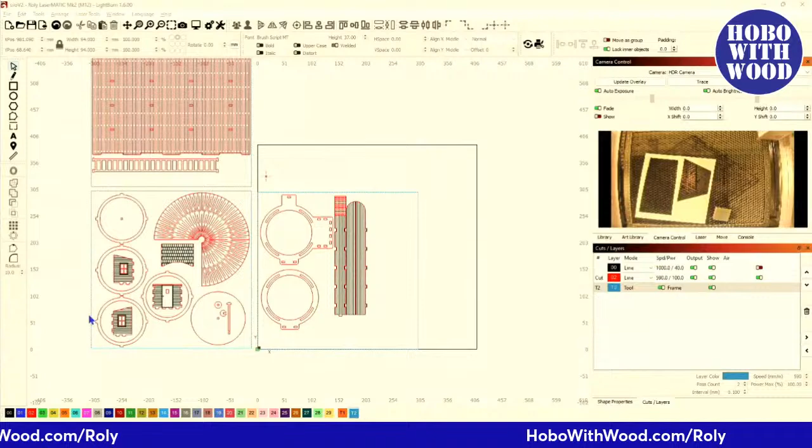So you can see here, I created 295 millimeters. If I select that outermost piece, you can see it's 295 by 235 millimeters tall. And if I say 295 divided by pi, that gave me about a 94 millimeter diameter for my circle that everything else needed to be based on.

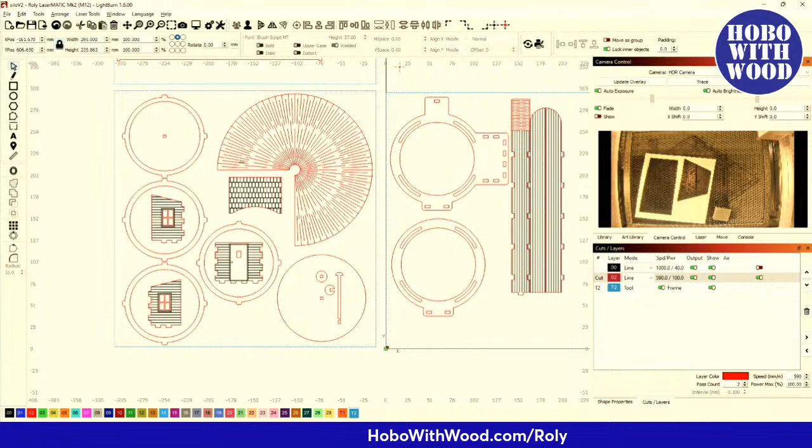The supports, then the top - once I knew how big the diameter was and I knew I wanted a half-inch overhang on either side, I knew I needed to add another inch to that 94 millimeter diameter, divide that, and then I knew what that circle needed to be. So before I could even start making the lid, I had to get the size of this living hinge, which then determined the size of the top.

Like I said, there was a lot of math and a lot of thought that had to go into this. And unfortunately, in my case, a lot of times it's afterthought - you're like, oh golly, I wish I'd have thought of that ten steps ago. Undo, and start again.

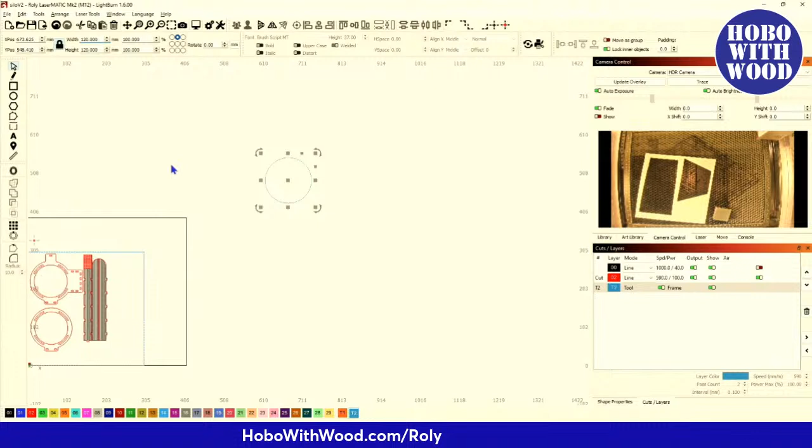But once I had my size, I had a 94 millimeter diameter circle. Draw out a 94 millimeter, lock my aspect ratio. And then I said, okay, I want to have a half-inch overhang, so that's another inch. Say 94 plus 25, so we'll just round that to 120 millimeters. So I had a 120 millimeter circle.

That's what I started with for my roof, my top. Now I had to create the living hinge. But when you create this living hinge, you're going to cut away a quarter of this so it can wrap itself together and form that conical shape. And you need to have a void in the center that will allow it to do that.

And I went with about a 20 millimeter hole. So I drew another circle and said to go 20 millimeters, and then put that 20 millimeters in the middle of that. So okay, there's the basic shape.

But now I had to create the living hinge. And the living hinge, if you've tried to do this, it doesn't work like any other living hinge because of the way it has to taper up. I think I actually did three steps, but I've improved it since doing this to where I think I can do it in two different increments of living hinges.

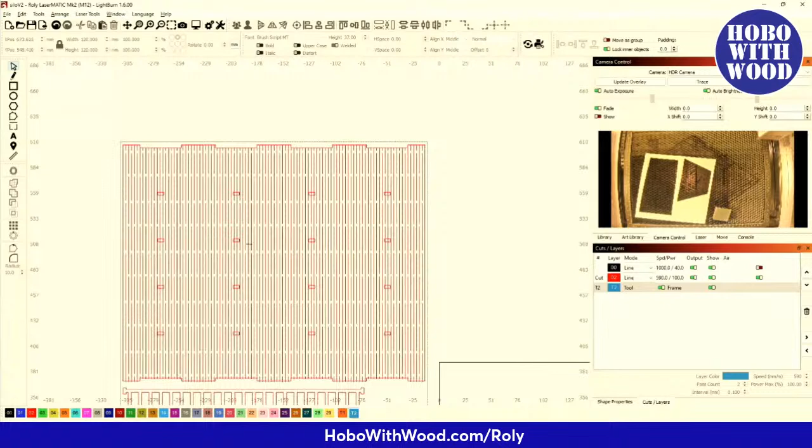When I did the living hinge for this guy, I used the grid array to create that living hinge - that's easy peasy. But this one, I had to use the circular array. And this was the first time I've ever used the circular array to create a living hinge.

And I'm gonna talk you through the math, and there's a lot of it. Some of you'll get it as I say it, or you'll go, oh yeah, I know what he's doing. And then some of you are going to have to back this up and watch it again, back it up and watch it again, or you just say the heck with it, I'm just going to buy the file and be done with it. Because it did have smoke coming out my ears.

Well, I'm gonna let you poke fun at the bear. Can you imagine how it would look if Clack had to design it? He says he hates math, and I hated geometry. I flunked geometry. I love math, I love algebra, but geometry was my weakest.

And Connie says, go slow on the math. All right, I'm going to explain it all.

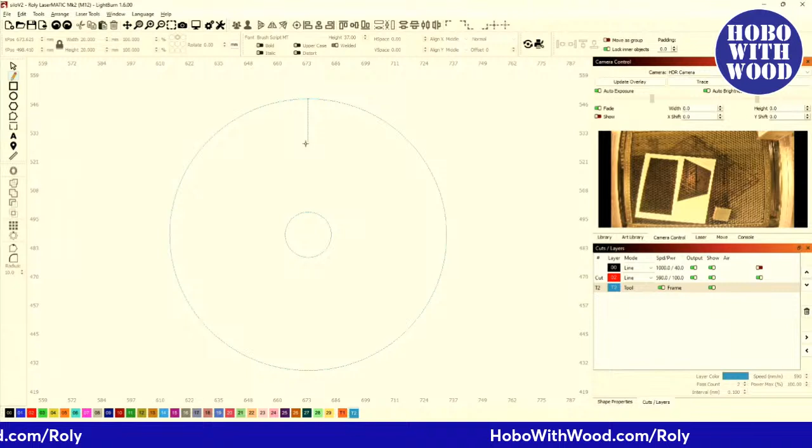So what I did first was come up here, find my crosshairs for the top dead center of my circle, hold my shift button, and draw a straight line. Doesn't matter how long, any straight line. Once I got that straight line, I selected it, and then I come up here to my height field. I don't know how well you're going to see this on the screen.

I'll use this field as a calculator, and I'll do this for you twice - once here, then I'll open the calculator and show you again. So if I've got a 120 millimeter diameter, half of that, the radius, is going to be 60 millimeters.

And here I want to have 3 lines, 3 cuts going across. So if I've got 60, before I divide that by 3, since I have 3 lines, I need 2 spaces in between, because I want the first line to go all the way to the edge and the last line to go all the way to the edge. So I need 2 voids in between those, and I want a 3 millimeter void in between each one.

I haven't seen any scientific proof or facts saying otherwise, but when I'm working with 3 millimeter material, when I do a living hinge, I make my gaps 3 millimeters. If I'm working with 4.5 millimeter material, I make the gaps between my cuts the same thickness as my board. That way, if you were to do a cross section of that cut, it would be a perfect square, and I think that's the strongest shape you could have. I don't know if it's right, but that's the way I do it.

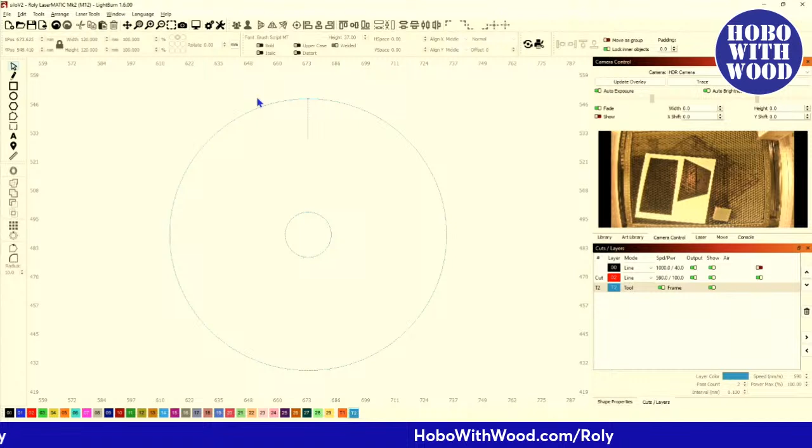So then I selected that, and select that outer one, and make sure it's in the center and at the top. And there it is. Now I'm going to open this up and clear all this, and now you can see this.

So I've got a 120 millimeter diameter, divide that by 2, gives me a 60 millimeter radius. I need 2 voids between 3 cuts, and I want my voids at 3 millimeters each, so I'm subtracting 6 millimeters. That leaves me 54, and I wanted 3 cuts, divide that by 3, that gives me 18 millimeters per cut for my first cuts. So now that is 18 millimeters.

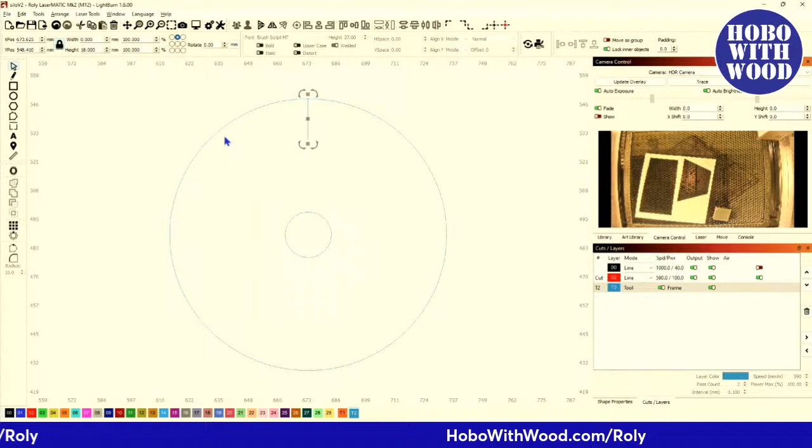Now I will use my grid array to create 3. Oh, did I do that wrong? No, I did do that wrong - see, this is what I'm talking about. You screw up, but hey, I found it before I got too far. I forgot to subtract half of that inner diameter.

So let's go back to the calculator. Cancel, go back to the calculator. So I got 120, divide that by 2, gives me 60, and I need to subtract 10 right out of the gate, so I'm down to 50 now. Now subtract the 6 millimeter void and divide that by 3, that gives me 14.6666666666. So now I know my length, and I've already centered this line.

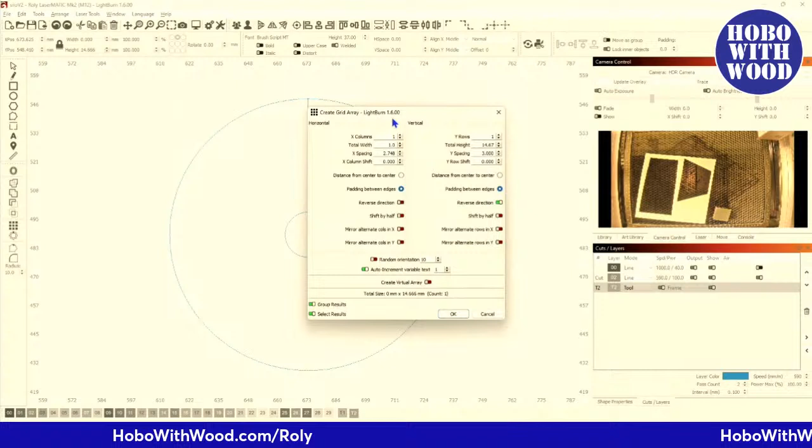Make sure your anchor point is in the top dead center, because you don't want that to move. So move that up there, and now you can come down here and change this to 14.666 and say enter, and that'll draw that line up. Now go back to your grid array and put in 3 of them with 3 millimeter spacing, say okay, and group your results, say okay. And now you've got that all the way out to the edge and all the way to the inner edge with the perfect spacing and perfect cuts for this size, for this shape.

Now select this entire piece, and we're going to move our anchor point back to the center, and we're going to rotate this negative 2.5 degrees - not negative 25, negative 2.5 degrees.

Now that I've rotated that, I can come back up here and draw another straight line. Doesn't matter where you draw it there. And this one, I'm going to align it to the center and align it to the top. Then I'm going to select it, and I've got my move functions, my arrow move function, set to 3 millimeters.

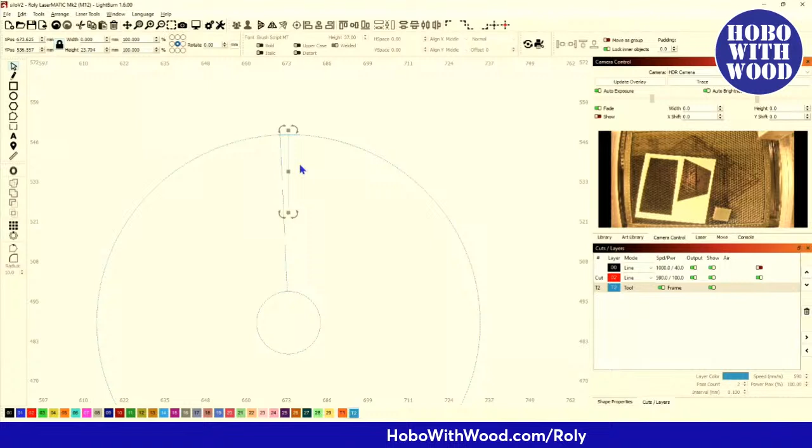Say okay, so I've got it selected. I arrow down one time, that moves it in 3 millimeters from the edge. And I'm going to look here - I think 2.5 millimeters. Let's do it. Let's go back and rotate it 3 degrees. Undo.

Rotate 3 degrees. Not 3, negative 3. I want to rotate it counterclockwise, negative 3. Now draw that straight line.

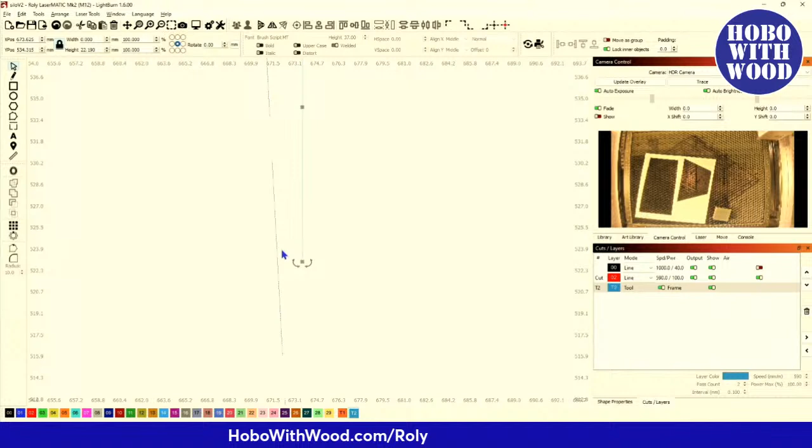Select it, top dead center, and then move it down 3 millimeters. I did that because I wanted a little bit more gap in between here and there, and that's still too much, that's too close. But I want to have a 3 millimeter gap here, and because this is a round conical shape, I have to deviate a little on the way I would normally lay it out.

So I've moved my anchor point back up here to the top of this one, and I'm going to reduce this to, let's look at 20 millimeters. Let's look at 18 millimeters. And I'm going to stay with that.

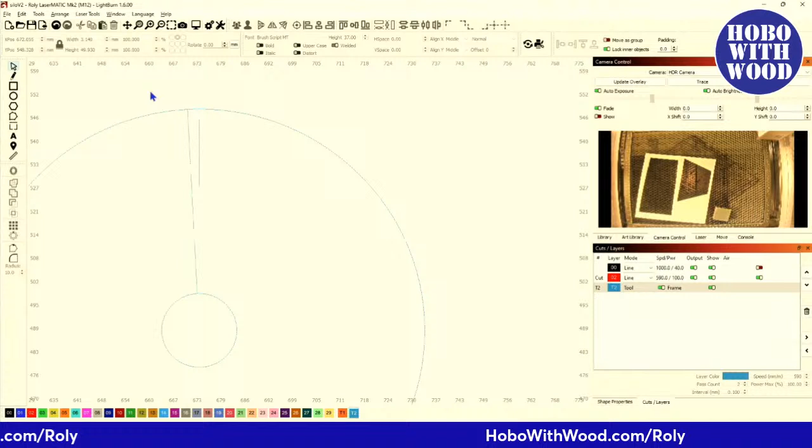Now I'm going to take that one and group those together. And with that group together, I will rotate the entire thing back 3 degrees. That'll work, well I will make sure I didn't rotate it from the center. I don't think it'd matter, but I'm rotating it from the center 3 degrees. There we go, all right.

And now selecting that group and the inner circle and doing a circular array. I'm doing 40 copies and say okay. And there's the first part of the living hinge for this piece.

Now what I need to do is rotate this positive 3 degrees and draw another straight line. Select that line, put it at top dead center.

And I can put it at there, but that's not where it's going to live. It's not going to start there. This one is actually going to need to come all... in fact, I'm not even going to put it there. I'm going to put, well, yeah, I have to put it there. There.

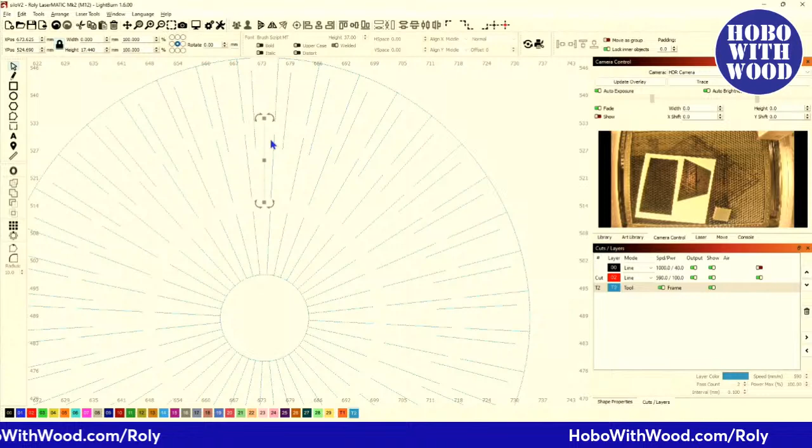Actually, I should have done 2 lines on that. Undo again. There we go. Undo 2 of those.

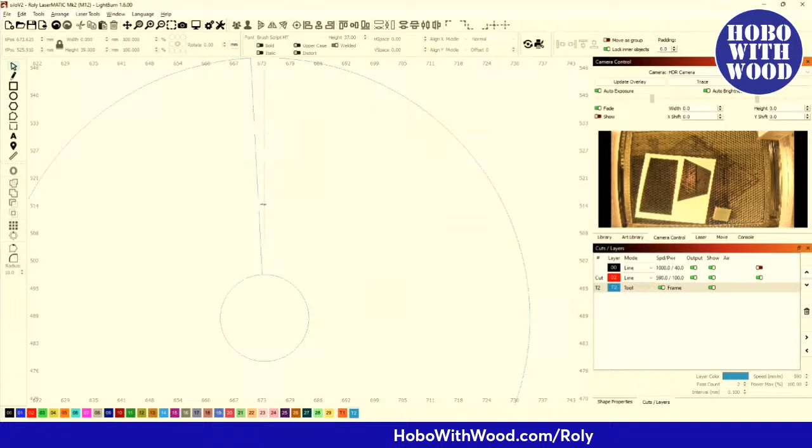And that one's actually going to be shorter, so I can ungroup that and then change that length. About there, give or take. Nope, group all that, I did group it all. And then this one, circular array 20, good.

So that was 3 and 2, and now I need to do 1, and we'll rotate it from the center and rotate it again. Just keep going negative. All right, and then another straight line.

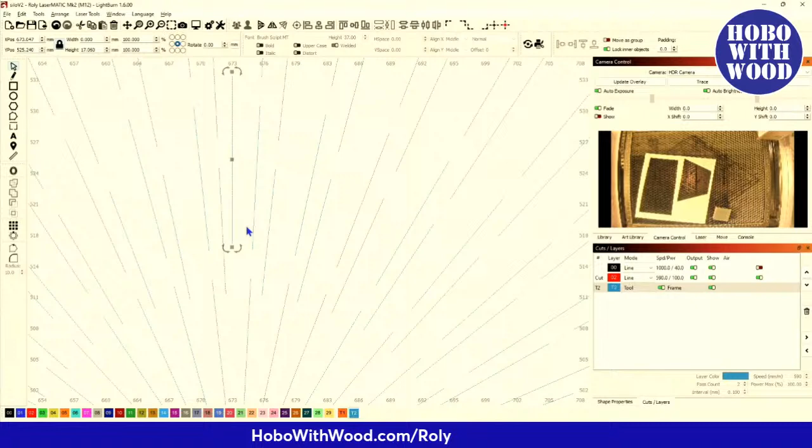And that one's not really, I was going 3 degrees and I was thinking sets of groups of 3 was what I wanted, but that's not where I positioned really, really well. But without having to go back and undo a whole lot of stuff, I want to put that cut in between those two as centered up as well as nice as possible.

So I'll just draw a rectangle about like that, and then tell that to go to the center of that rectangle. And that centered that up better. And I can get rid of that.

Now this one, I think I did this 2 or 3 days ago, so I forgot actually how all my steps went. We'll take that one, because this is not looking like the way my first design came out. Maybe it actually, maybe it is, maybe it was just something like, no, I don't remember. I don't remember, folks.

Once you got that one, in fact, you know what? Duh, I got it right here.

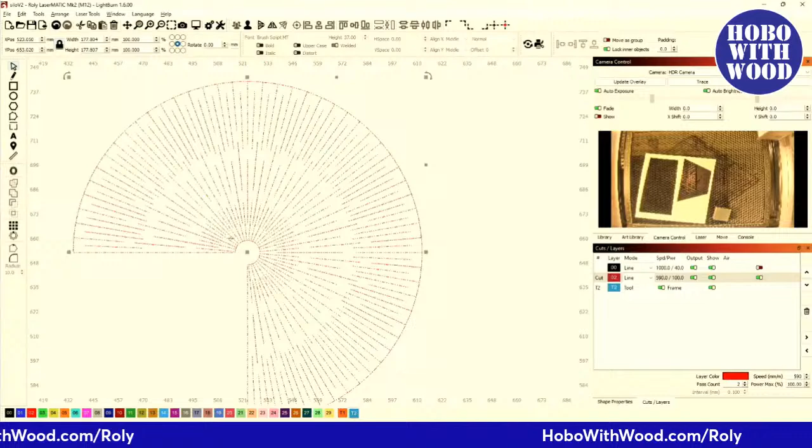I'll answer it. So I had 1, 3, 1, 3, 1, 2, 1, 3, 1, 2, 1, 3, 1. So you can see the pattern that I ended up creating, and I went through half a dozen or more iterations of this living hinge to get it to work.

But you're starting to see the real trick is figuring out the math. How long, what size is it going to be? What's your overall diameter? I showed you how to figure that out. Then how long do your cuts need to be? Well, you know what your diameter is. Half your diameter, whatever your void is, subtract half that diameter. And then whatever your material thickness is, subtract the voids between each cut and divide by the number of cuts you need. That gives you your length of each cut.

And there, I finally, when I went back and looked, I did 1, 3, 1, 2, 1, 3, 1, 2, I think it was. And that allowed it to wrap up and do what I wanted it to do, and to bend the way I wanted it to. It doesn't have a uniform living hinge like your typical living hinge. You see the larger voids where there's a different number of cuts. It has to be irregular in order for it to bend and come up in that conical shape.

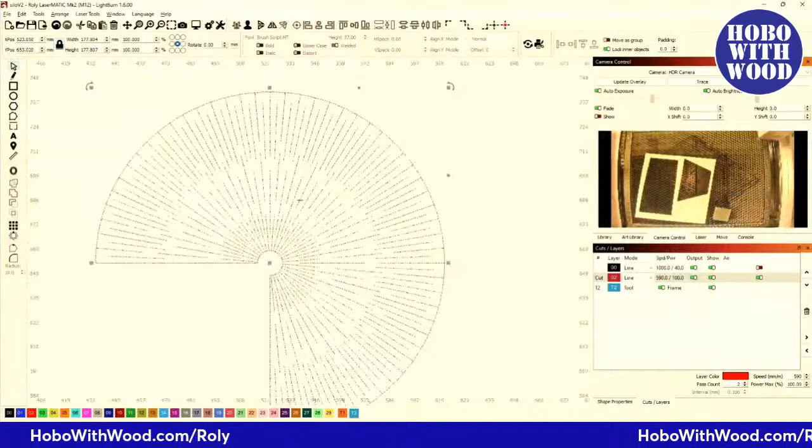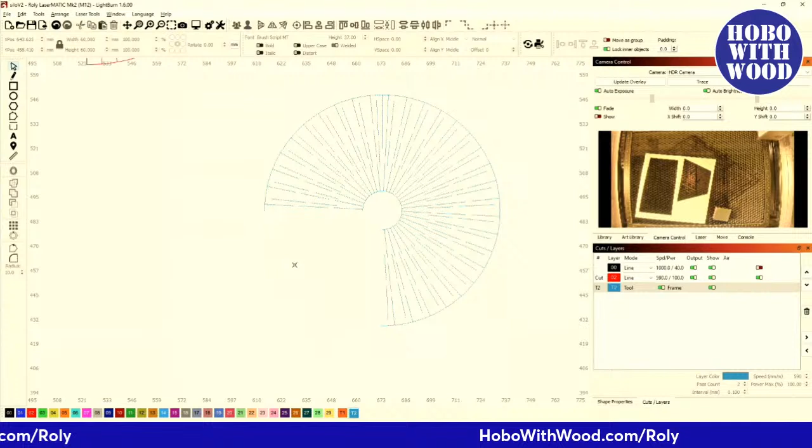Now, how did I get that cut? Once I had this, let's say this was the final design, if I had a 120 millimeter diameter, I drew a square, held my shift key, drew a square, told it to be 120, so I went half of that, 60. So I got a perfect square, 60 millimeters, and put it right in the center, right there when it snapped. Then I selected my shape, held shift to select that, and then tools, cut shapes, and then select that piece, delete it, and close that up.

Boolean tools would work too. Edit, undo. And I'm going to put this on a toolpath to see it better.

So A and B. No, because that's the reason why the living hinge is funny. They're lines, they're not shapes. And because you're working with lines and not shapes, the Boolean tool won't work with the living hinge, so you have to ungroup all of that.

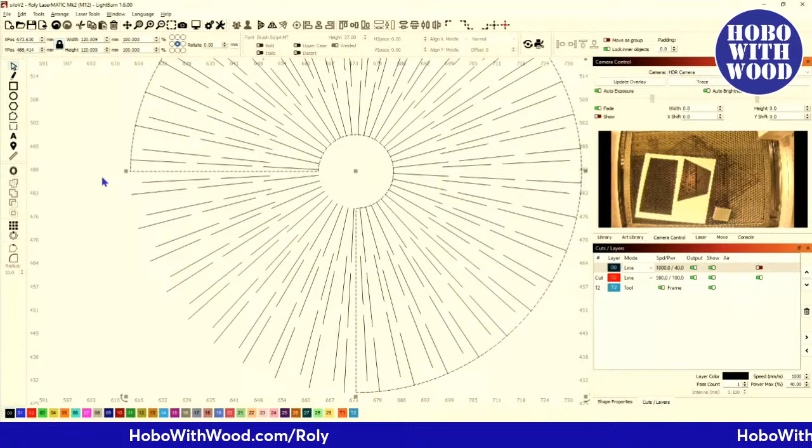So ungroup, then select your shape, your circle, and you can group those back together. So that's A, and then select B, and then you can subtract that, and that would give you a closed image, and you can select all of those outside of it. Well, actually, that's still grouped, so you have to ungroup it, and then you could select all of them and delete them.

Come on. There we go. And there.

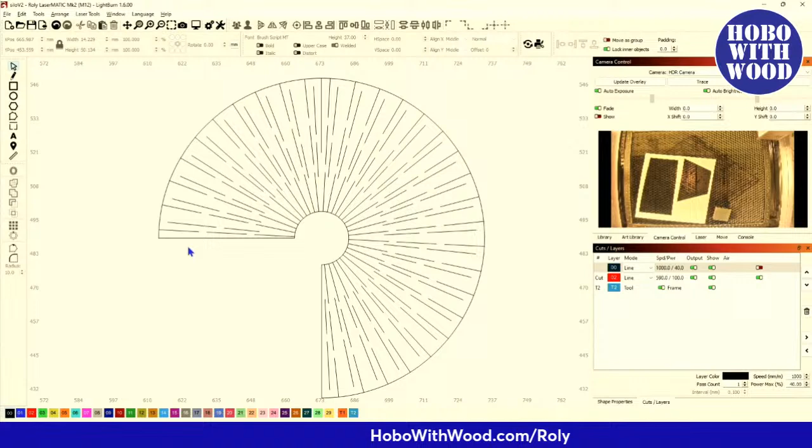But because those lines are lines and not shapes, you can't use Boolean with lines. But if you unselect that and just get your two circles, group those to make those two circles one object, then use the rect or the square as a cut shape for your Booleans, that would give you a closed piece there that you don't have to close with the cut tool. And that gives you that. So that's how I got around to finally coming up with a living hinge that would fold up and make the conical shape the way I liked it, the way I felt good about it.

So let's go back to those questions. Go back up here to my asterisks.

I don't know about you guys, and I think, Jack, you may have seen it. Every time I see an asterisk, our local police department has special license plates on some of their cruisers that show the number 1 and an asterisk. I finally broke down and asked what does the 1 asterisk mean, and they said, say it. I said, say it, 1 asterisk. And he said, yeah, say it slower. 1 asterisk, 1 asterisk, 1 asterisk is our SWAT guys, our special response team. But I'm thinking, okay, that's cute, but is that really appropriate for the front of our police cars? Don't know.

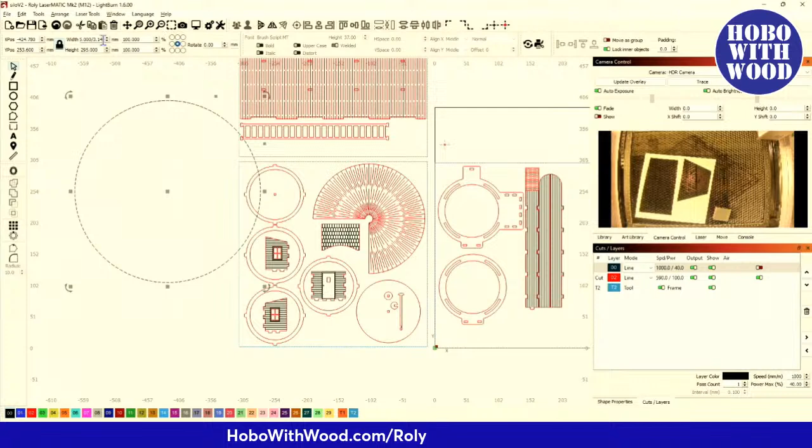Let's jump over here and use the actual numbers. I said it was 295 millimeters. So if I drew out a perfect circle and told it to be 295 millimeters... not quite, divided by pi. 295 divided by pi, there we go—that's the outer diameter of my living hinge rolled up. So instead of doing the actual math and figuring all this out, a lot of this I just did by recreating the physical environment and letting Lightburn do all the math and figuring for me.

So I've got that selected. I simply said let's do an offset inward. My material is 3 millimeters. Don't delete the original, say okay. I'm going to put the outer one on a toolpath because that's my outermost piece. Actually I need to put them both on a toolpath and we'll group them up. So there's the cross section of the column. And actually I don't want to group them because I need to be able to select that one individually.

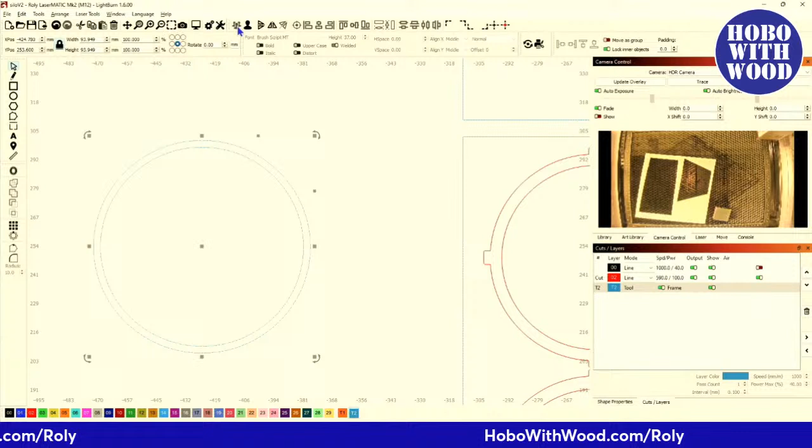Now that one, I could duplicate it, but I'm not going to bother because the tabs are going to stick through there. This will be the outer diameter of that support. I'll do another offset and make it 5 millimeters just to give it some strength, some rigidity, make it rigid. So now that would be the ring. And then my slots, I used 3 millimeter by 6 millimeter—so it was 6 wide, unlock my aspect ratio, and 3 high. And put that on top dead center of that one.

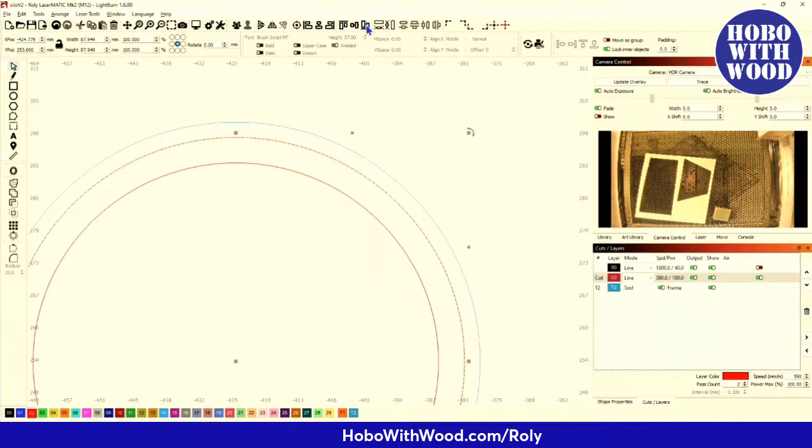Oh, wrong way, Conway, up there. Actually, I didn't want to do top dead center, I wanted to align it. So if I've got that up there, I'm going to turn off my toolpath so I don't see it for right now. Now with that selected, hold my shift button and select that one, and say Alt-Shift-V for vertical. That'll bring that right to the outside of that.

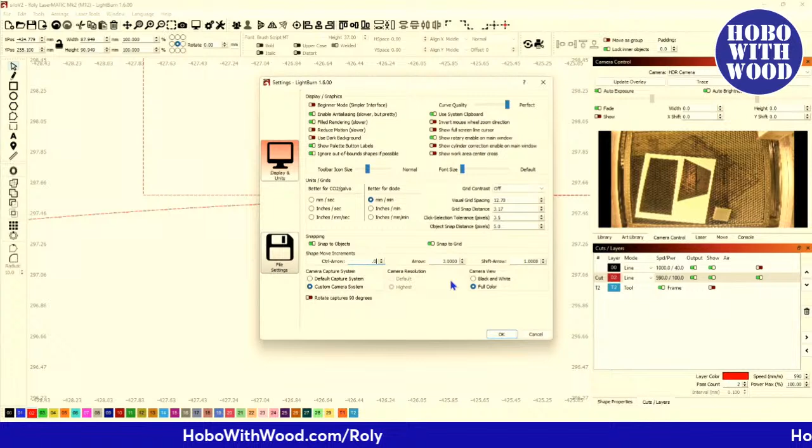And if you look, you've got a gap there, so that's not going to weld up very well. So then what I do is I make sure I've got my movement, my control arrow, we're going to do it at 0.002 and say okay. Now select just that one, hold my control button and my down arrow button, and bring it down until that's inside my circle.

Once that's inside my circle, hold my shift button and select the circle, circular array. I only need, you can do as many as you want. I went with 4 because I wanted to have as few places I have to insert, and also I wanted as few holes in the side of my silo as possible. So I went with 4. I group my results and select my results are turned on, so that will select my array when I'm done. Now all I have to do is hold my shift button, select that outermost circle, and weld them. And there we go, there's a support ring.

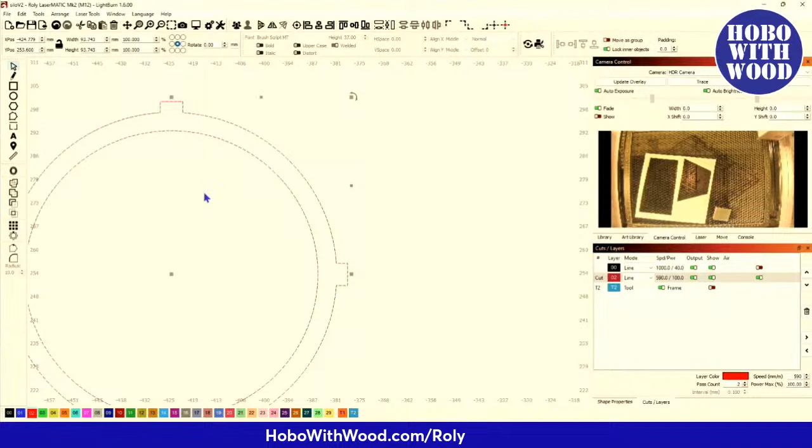But to make this easier to assemble, especially because you're rolling this up, if you've watched the assembly video, I put one in and then I'd start rolling it up like rolling a cigarette, rolling that up on its sides. Because I'm rolling that flat piece up and hitting that corner, to make it go in as easy as possible, I put a small radius on there so it can slide over that and not have a hard corner.

What I should have done, if I hit undo, take it back to that, just go in here, and now with the singular, hit my radius tool. That was 3 millimeters tall, and so I went with, I think, about a 2 millimeter radius. Nope, didn't do 2, that's too big. I think it was maybe 1 and a quarter. Yeah.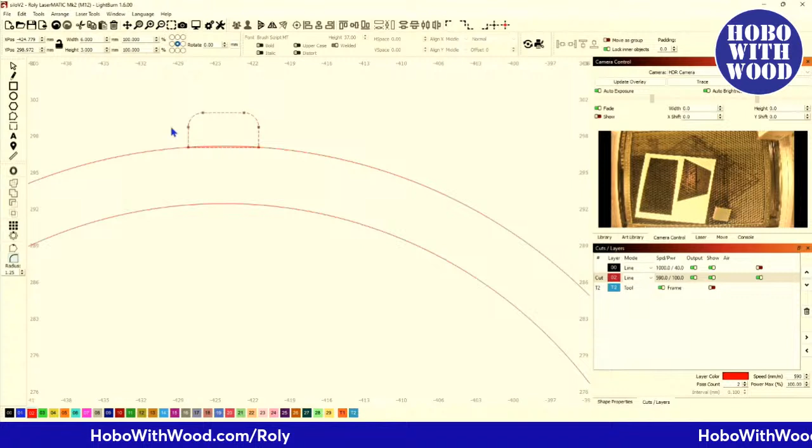Now with that, hold my shift key. Now do the circular array, 4 of them, grouped and select. Okay, hold my shift button, select the outer one. And now I want to show you another thing.

If you have problems, you're like, wait a minute - because I get people all the time who say, I did what you did but it didn't work. I did everything you did and it didn't work. But you didn't do what I did, or else it would have worked - if it worked for me, it's going to work for you. And that's why I love those comments, like, well I did that but it didn't work. Well, then you missed a step. I want to show you what you can miss when you're trying to do this that makes it not work.

So here, I've got my circular array that I just generated, and I hold my shift button and I select that outermost circle, but the inner one is not selected, just the outer. And then I can weld it to that circle, and now that welds that up. Now I can grab both of those and group them, and now that's one piece. I can move it around anywhere I want by grabbing just one piece, I ain't got to worry about it, everything's together.

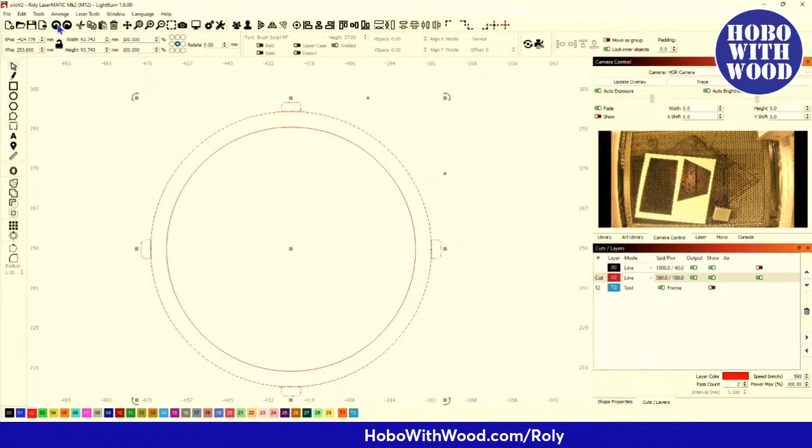But what can happen if you're not paying attention to what you've done and when you've done it? There we've got a group array, we've got a single circle and another single circle. Well, if in your process of creation, like I did, I grouped those early on and I said, well no, I'm not going to do that yet. Well, if I had left those grouped, and now if I grab this and hold my shift button and select that, then well, that still worked.

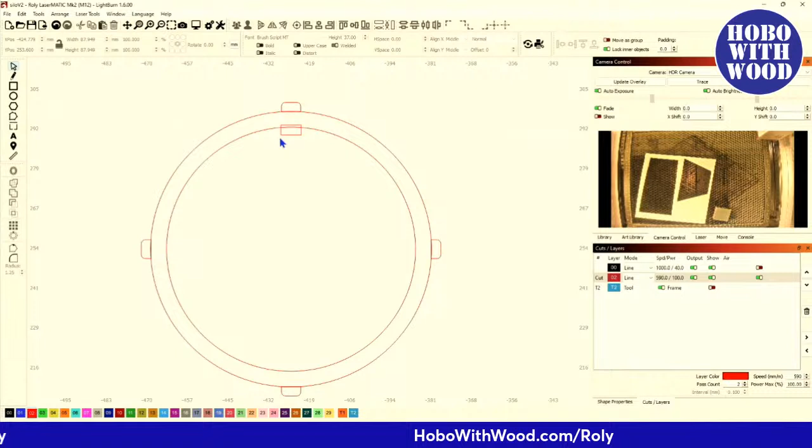But if that was - if those tabs were on the inside, and this - I just want to show you where this can be a problem. People say, well it didn't work for me. Well, you did it backward. If those tabs, I'm just going to create a new one instead - and if it was in here like that, and these were not grouped, if I select that and select this and weld it - where'd it go? Welding did not give me the piece that I wanted. Undo.

But if I've got these two grouped, hold my shift button, select that and weld it, then that creates that.

Whenever you don't get the result you're looking for, it might be a grouping issue. You've got either things grouped that you shouldn't have if you're trying to get a certain outcome, or you need to group things that aren't grouped.

I've got a comment or two to address from folks saying, yeah, I tried that, it don't work. Well, it's not because it don't work on your computer, it's because there's a PICNIC error. Problem in chair, not in computer.

Before I go too much further, let me look and see if there are any questions. Well, Nancy, I don't have a lot, but I appreciate all you do, Kent. Thank you very, very much, guys. I am grateful, very grateful.

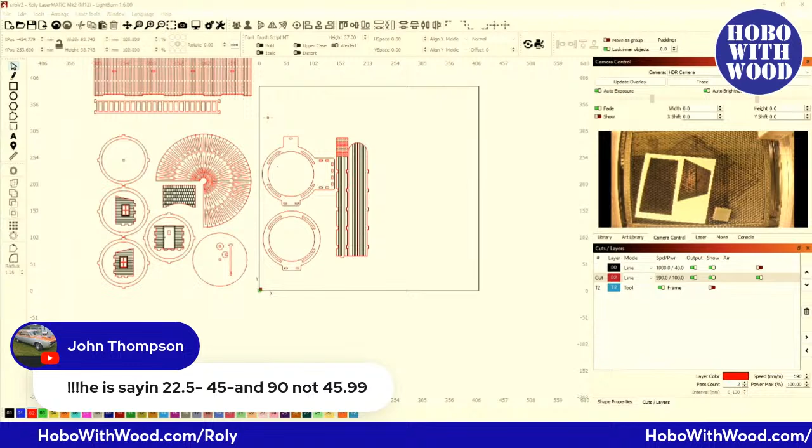I'm guessing you guys are following these comments too. I'll be honest with you right now, I don't understand a lot of this. I see it and I can make it work and figure it out, but I don't fully follow what you guys are talking about. If y'all know math, algebra and all that, I get that's divisible, makes the equal divisibility of 360. I don't know, did I say 45.99? I don't know where that's coming from, but okay, 22.5 or 45, okay.

Now I'm with you. Sorry, guys.

Before I jump back over, there are times when I edit nodes on one thing, then add a shape to that, then try to weld it, and it will not weld. No matter which way I select it, can you help?

Yeah, the reason it won't weld after you've been doing node editing, and I know this because I have the same problem, most likely is that after you've node edited it, you've left it as an open shape. And an open shape, while it looks like a shape, technically is just a line. You can't weld anything to a line, so it has to be a closed shape to weld objects to it.

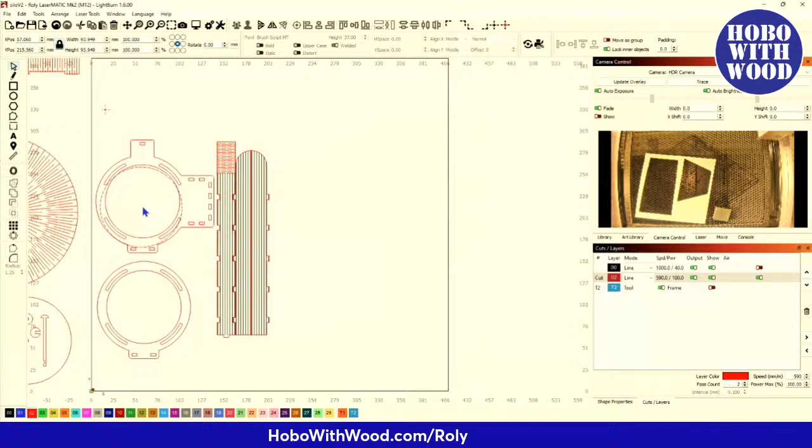All right, so there is my innermost circle. Or that I should say that is the outer diameter. That's the outer diameter, if I did that right. And we'll just double check it. Aspect ratio. It was 295 divided by pi. Yep, all right, so that's the outermost diameter.

And I'm going to put that on a toolpath and turn my toolpath back on so I can see it. And I want to bring that one over here. I can't center it on that one, but I can't even do it on this one because this additional shape down here is throwing off my ability to center it. But there we go, that snapped into center there. And if we look...

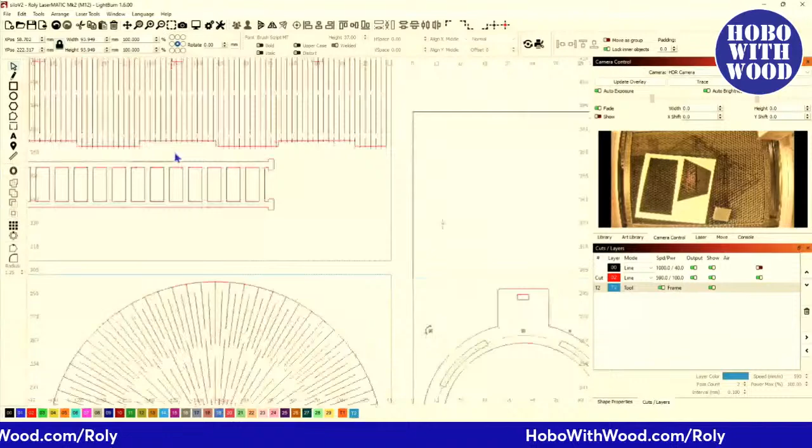Make sure I got that right. Is that 295? Yep, 295.

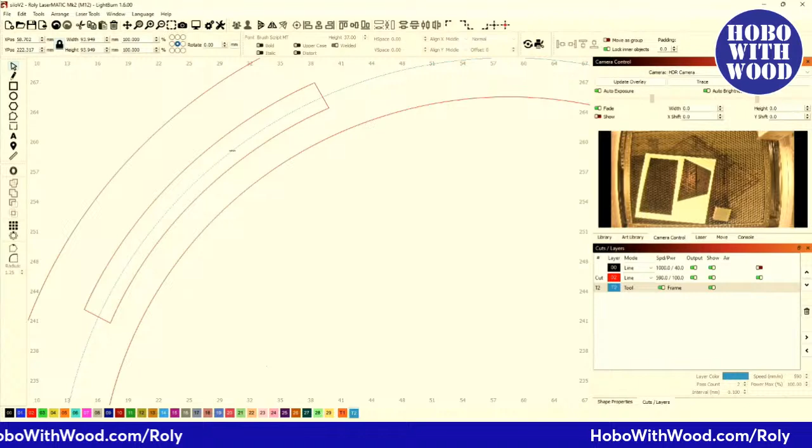I may have had to go back, because like I said, I designed this, redesigned it, designed it again, redesigned it. But in my mind, the way that this piece needed to be put together is if that is the outer diameter of that column and it's 3 millimeters thick, then those pieces should have gone on the inside, right? That's the outer diameter, and yes. Then I would have thought that those pieces - but here it looks like that is centered up. And I've assembled this a few times. And I've slept once or twice since doing this. But that's what it's looking like. There's my outer diameter, and it's centered up in those squares instead of inside of it.

All right. Well, how did I get that shape?

Three millimeter - I have a 3 millimeter circle, or square rather, and I'm gonna put it up here. Where'd you go? Oh, wrong way. All right.

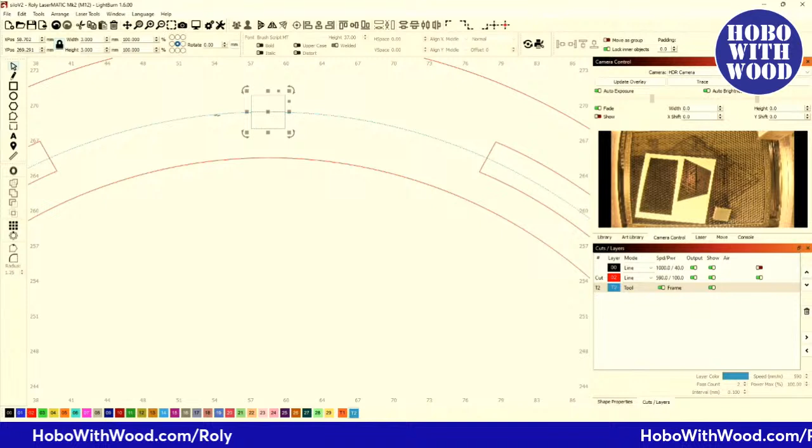Now, with that like that, holding my shift button and selecting that circle, come over here to circular array again. And now I'm going to change my step. I'm decreasing my step to bring those to where they overlap each other.

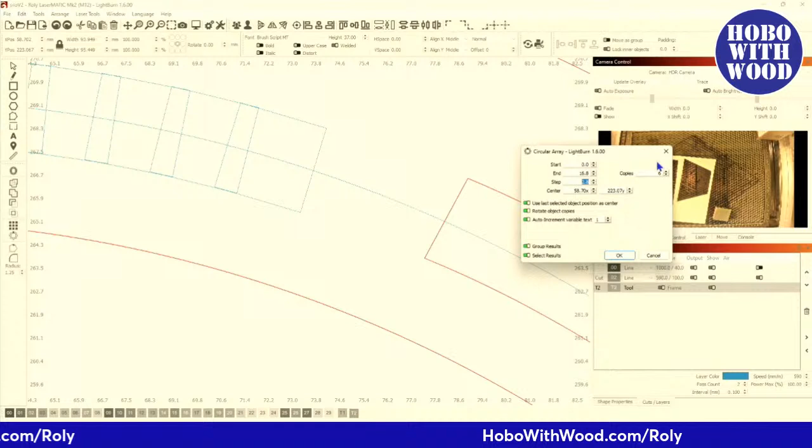And then I'll increase my quantity and get the step to where I want it to be, to where I get the size that I want it to be. And now I'm starting to get a gap, so that don't work. So we'll decrease the step again and just keep - nope, increase that step. There we go. And then group and select.

So that right there, and I'll hold my shift button and bring that back to the center. I didn't want it to go that way. Undo. I'm going to move these out of the way now, move them up here. I'll move them over here even more.

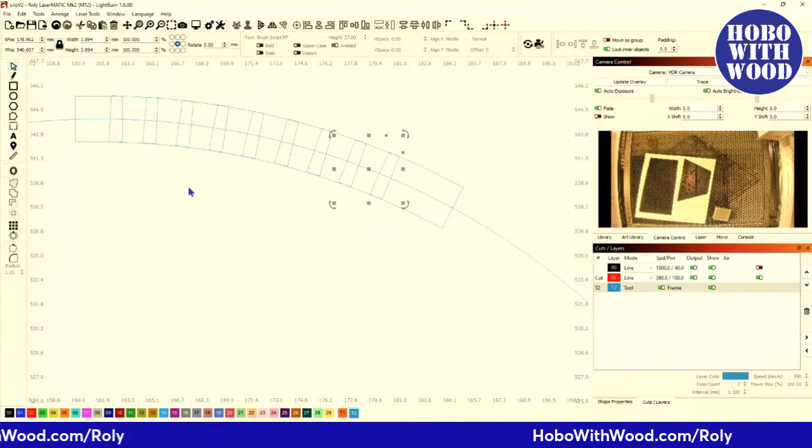There we go. All right, so now I've got the basic shape, but they're all a bunch of individual pieces. So I'm going to ungroup them and just weld them together. And you can only weld 2 objects at a time.

And there is the shape that I needed. And now I needed to create 4 of them, and we're going to put our step back, and we're going to do 4. Come on now. Nope, 3 copies.

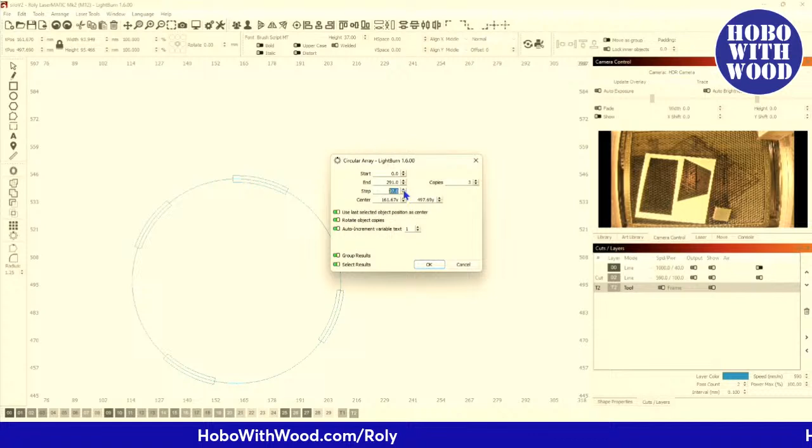Well, because I'm not at top dead center, I'm having to put it where I want it. And okay. And that's how I was able to create the slots and position them where I wanted in here.

And then it was just a matter of creating the necessary offsets. Delete the original, and there we go.

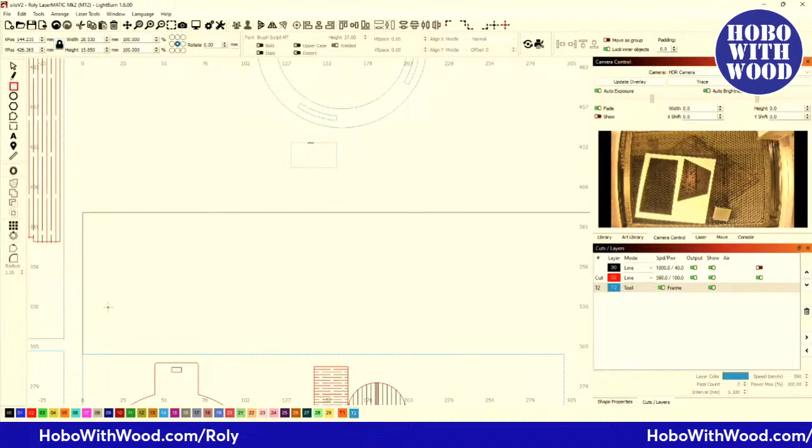Then it was just a matter of deciding where I wanted to put the grain elevator, the shed, and the ladder, and just create the rectangles for those and line them up with the - come on, puppy.

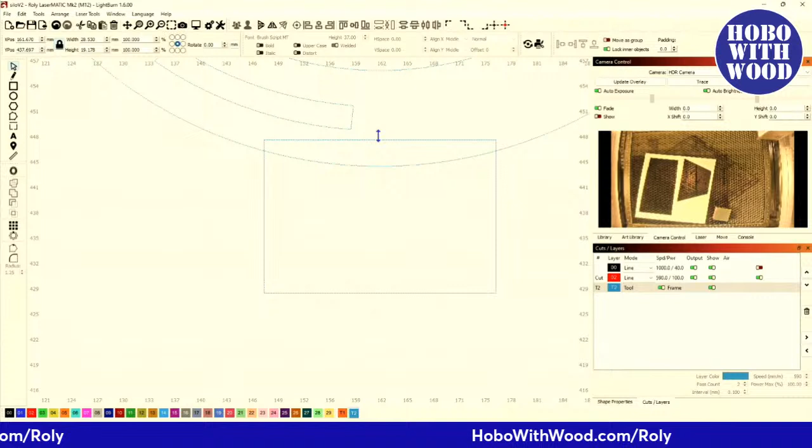Alt Shift V. And again, when you're welding a rectangle to a circle, if that's the size you want it to be, well, there's a gap there. Instead of moving that in, because I wanted that to stick out that far, just drag that in until it overlaps. That way you still got the same distance out here. And then weld that to that. And then give it some radius on these outer corners so it just looks nice.

And so on and so forth. And that's how I did the tabs out here for those pieces.

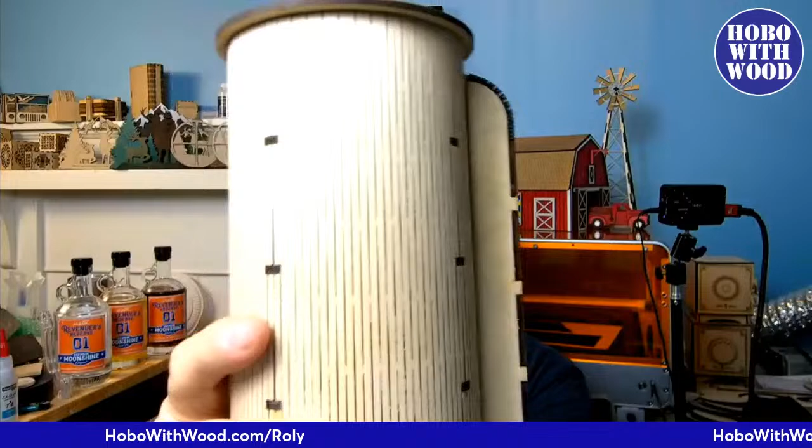And then on the chute, the grain elevator, that was a simple living hinge. And then because of the way the living hinge creates those vertical lines, when I did this one, you notice I did not have the marks on the grain elevator. I didn't engrave any lines on it. And I said, that stands out like a sore thumb. I did not like the way that looked.

I didn't like the way I had those oriented either. I changed it - the original was shed, grain elevator, and then the ladder. So it's like, okay, we see the shed, well you only see the grain elevator, and if you see it that way, then we'll only see the side. I didn't like that, so I had to rearrange both of those so I could put my shed out front, see the grain elevator, and then the ladder, all of them there.

But on the grain elevator, I opted to engrave vertical lines on the sides. So now it's more aesthetically pleasing to me. It blends in, it looks like it's made out of the same corrugated steel, if you will, or the metal, aluminum, whatever they made it out of.

I left the shed natural, so it looks like an old wood shed, but with lots of detail in the engraving - the door frame with the 45s, same thing with the window frames and the mitered edges, and the lap siding engraved into the side of it.

And then I forget who it was, somebody commented about how much they really liked the way this paint was done, and it shows up better in the photographs. There are parts of this that look like it's got some age, or wouldn't really be rust, but tarnish. And I painted this in 2 steps. I painted it with a high silver metallic spray paint, and I did it with one light coat. I did not do a heavy coat.

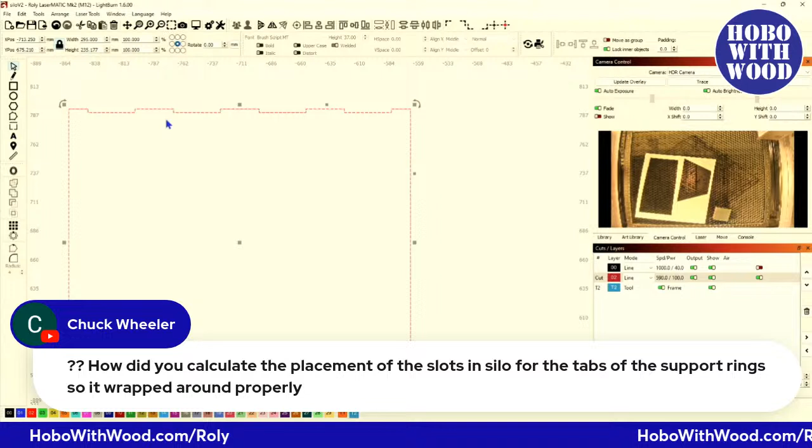So initially I actually started out with a rectangle. If I go in here to node editing, I'm going to delete all those - not that, I hit the delete. See, I do it all the time.

I know better than to hit the delete button. If you select all your nodes and then hit the letter D for dummy, it will delete them. But if you hit the delete button, it'll delete everything. Shame on me. In fact, I don't need that right now, and I don't need that one right now, and imagine all those down there are gone too.

I started out with just a rectangle that was 295 millimeters wide, because that was the thickness, or the width, of my material. And then the height of how tall I wanted the column of the silo to be.

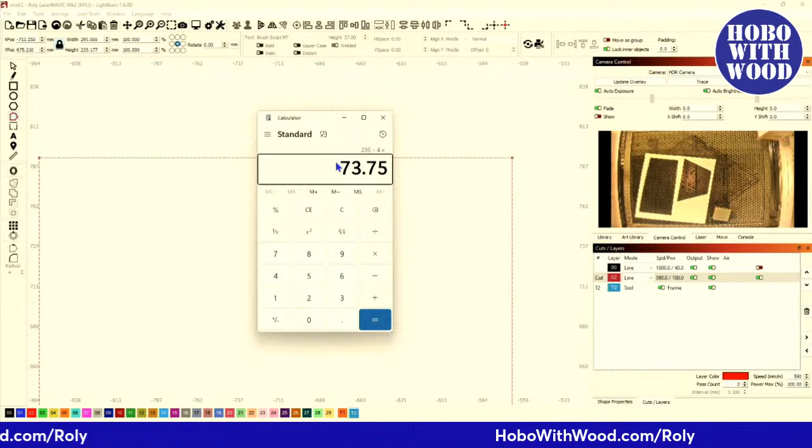Now I had to figure out the tabs, and I knew I wanted 4 tabs. So 295 divided by 4 makes them 73.75 if I had 4 tabs. But I don't need 4 - I want 4 tabs, but if I've got 4 tabs, then that means I've got to have 1, 2, 3, 4 spaces.

And I split my tabs up so that - and this is something I did intentionally - I used, I can't even find it on this. Okay, here. On this one, I had the seam behind the ladder. But the seam is behind the ladder, and it comes up here.

The seam is part of that grouping so that when those went into a slot, it helped pull it to a final defined dimension. Otherwise, if the seam's over here on the side somewhere, then there's nothing holding that seam or pulling that seam together. So I thought about that when I laid out these tabs as well.

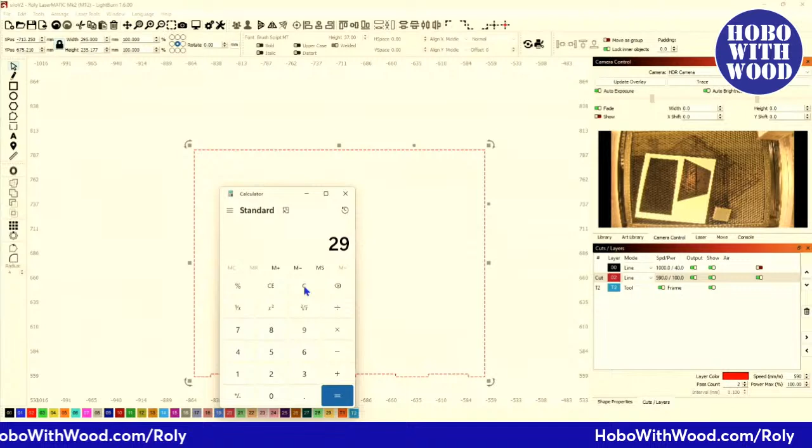Not 5 by 9, stupid. Come on. 295 divided by 9. There we go.

So I needed 5 equal - 5, I did it again - I needed 9 equal spaces. 5 of them would be tabs, 4 of them would be slots, right? So if I needed 32.777777 to equal the width of one of those...

Draw a rectangle tool. 32.777 and 3 millimeters.

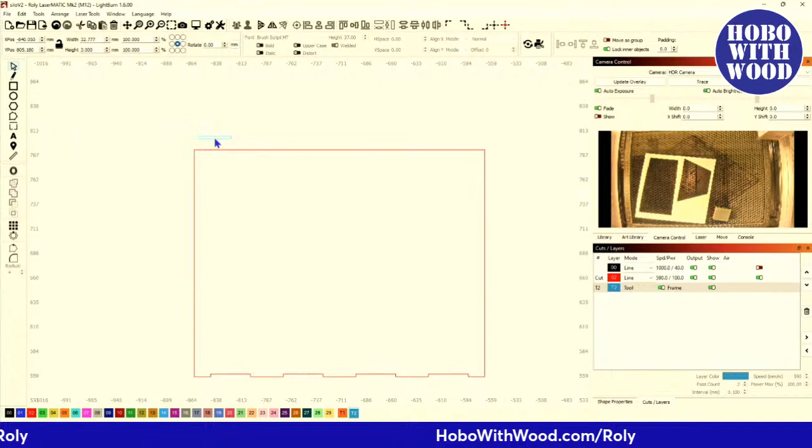And then what I did - if you go in there tight, you see I get the little, I hope it shows up for you guys, but if you go to the center, your cursor will change to where you get a little circle right there. You can grab that circle once your cursor changes, and I'll snap that to the corner of my material.

And now I can do an array with that 32.777 - not column, not rows, columns. Why didn't that go to 0?

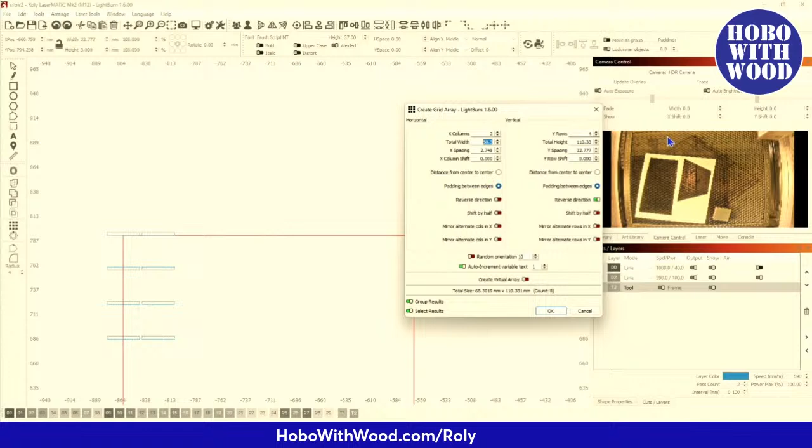Oh well, we'll just cancel you. Columns. 32.7777.

And I'm not getting the result that I thought I was going to get. Oh, okay. Got to think.

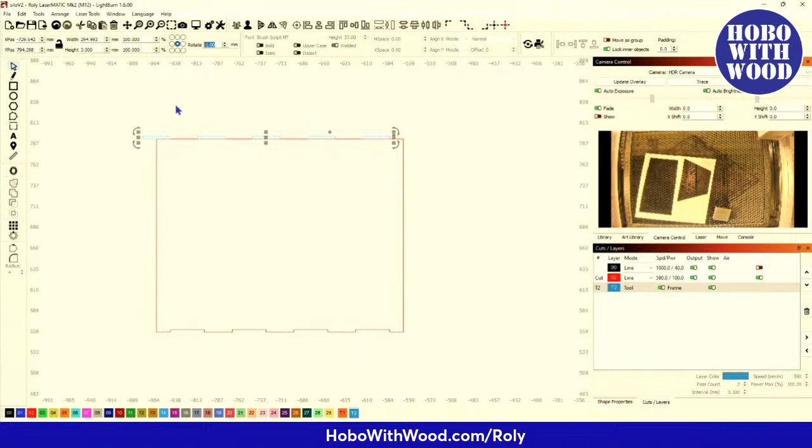All right, so that's the grouping. So I'm going to take and move that. Why did it rotate on me? Didn't want to rotate it.

Grab that, find that middle. There it is. And now snap that to there. There we go. Is that right? Yeah, so now with that there, that's grouped.

Now I first select my rectangle, hold my shift button and select that array, and subtract. There we go. Did that give me? Nope, that was backwards. I might have had it right to begin with.

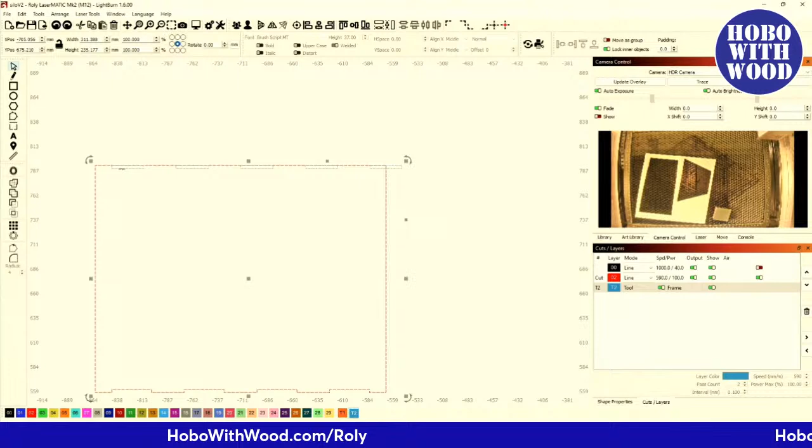But it's getting late and my brain is cooked. But what I did is I found the right spacing, which was 32.77. And then half of that - go back there. Ungroup that.

And actually, you can use this as a calculator, 32.77. Unlock your aspect ratio and divide that by half. And that's the right size for that piece.

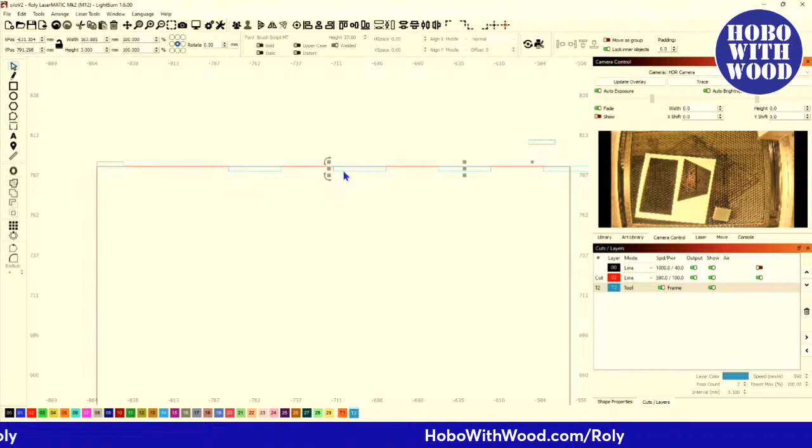Snap it right there. There we go. Now I'm figuring it out. And now I can duplicate that. Control D, duplicate it, bring that over here. Let's get rid of these. Move this one down here. And then grab this one. I'm going to nest it right up against it. Snap it right in place. Then come up here to my controls and set my move arrow to 32.77 and say OK. And now arrow over one time.

And now I can use my array and do that. Nope, still didn't get it right. Told you, math hurts. And y'all, I forget who it was that said they used all of their 4-letter words and then some with the assembly.

I did it designing this thing. But once you have the right size using that array, then I can weld those up. And then that's how I got the tabs placed and knew the exact placement of where those are going to be, knew the spacing that they needed to be, and then use that distance to position those slots. I'm doing that with 1, 2, 3. I did the math wrong because I still tried to do it.

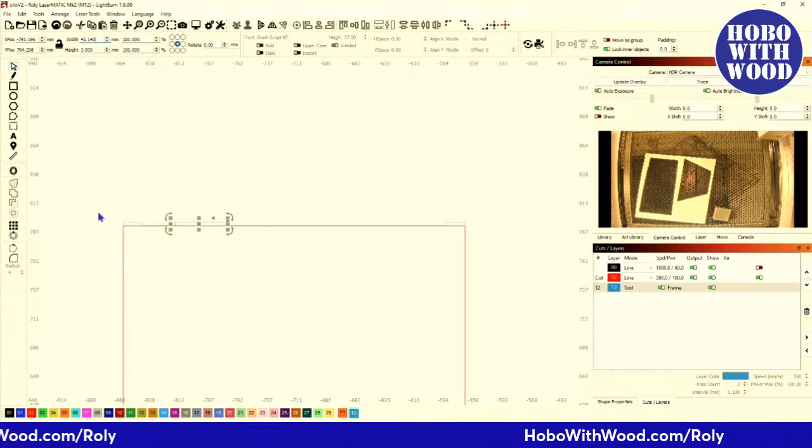I should have divided by 9... no, I should have divided by 7. See? Golly. So 295 divided by 7 would have been the actual length. Cancel. Switch. 295 divided by 7. There we go. Delete that.

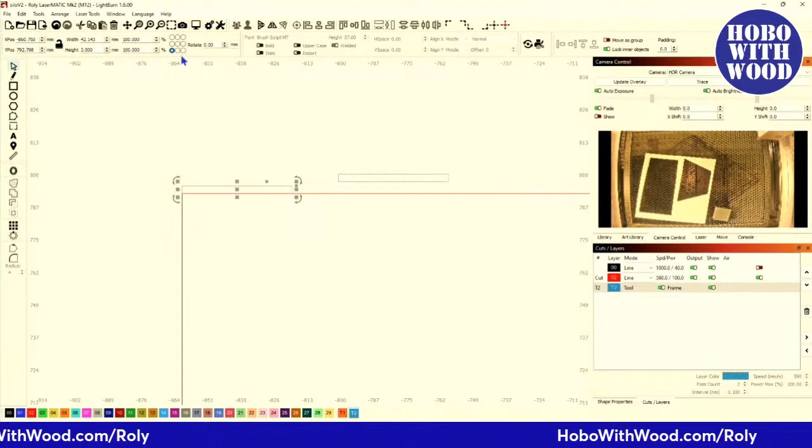I can position that. I put it right where it needs to be. I'm going to change my anchor point to the bottom left and now come up here. In fact, before I do that, I'm going to Control D, duplicate that. That didn't work, delete. I was in the wrong field. Control D, duplicate it, move it up. Now with my anchor point in the bottom left, divide that by 2.

There we go. And now I know that this docks up there, and it is 42.143. Arrow over one time. Get rid of that. Duplicate that. Control D, duplicate it, and then align it to the right. And now array.

I still didn't come out right. Did I not get my space? Well, you know what, I know what it is though. I think I do. All right, we'll just say we're not going to group them. We'll say OK. Oops, select all of that.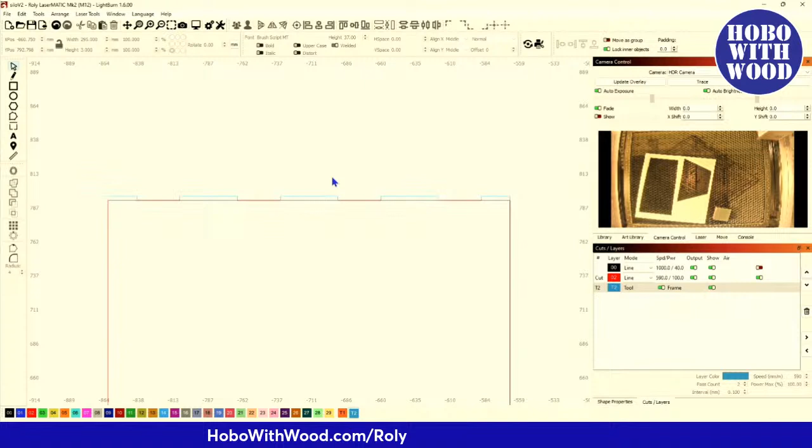Oh, so 1, 2, 3, that's 4, 5, 6, 7, 8. 295 divided by 8.

I know some of y'all are getting bored and you're tuning out on me because I see my numbers dropping, and I hate when I do that. Oh yeah, there we go.

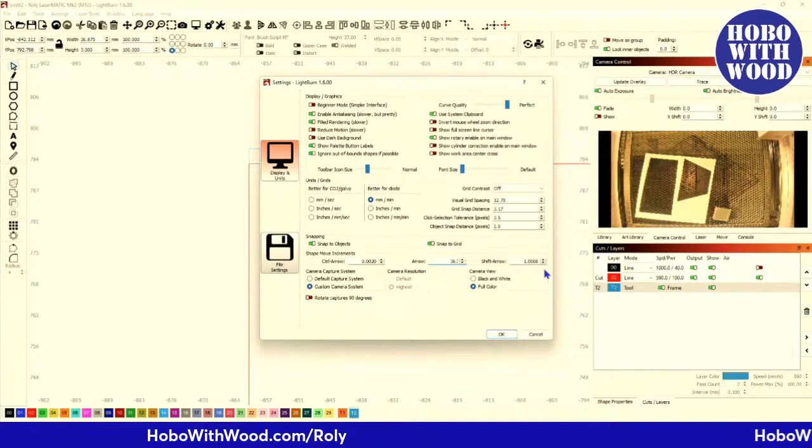Anchor point there, divide it in half. It's 36.875. Arrow, 36.875. Control D, duplicate, and then align it to the right. And there we go. Now group all those together and weld that together. And that's how I got there.

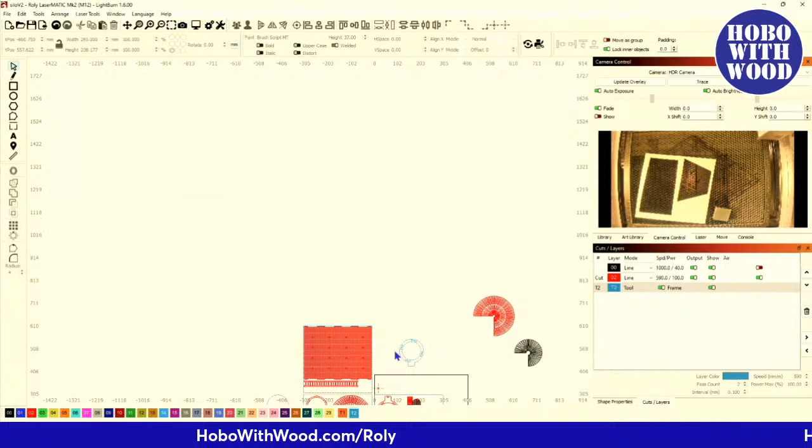Okay, now how did I get the roof line for the shed? Because that was the question I was supposed to do, and I didn't do it. So what they're referring to is here. How did I get that? That is so difficult, so difficult.

Once I had my rectangular shape for my roof line, and I built that design, just said that's what it's going to be based on the size of my shed. Once I had that, put it in a cut path and go ahead and put the shingle. Oh no, go back to cut path, deselect, rectangle. Come on.

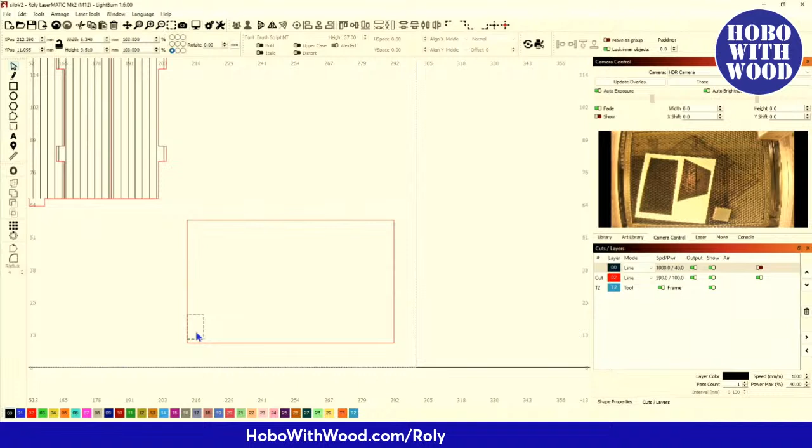I'm going to show this just because some folks might not be aware of it. But to create my shingles, I used the grid array.

I did 0 spacing columns, filled up those columns, and then did rows. Those were going in the wrong direction, so I took off my spacing, reversed the direction, and shifted by half.

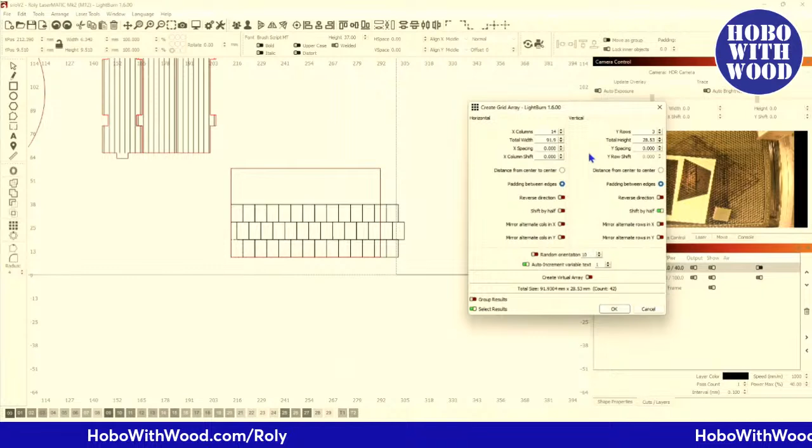Now that created a void right here. There's no shingle there, no engraving, but I'm way past the outer perimeter, so that's fine. So I take my shingles on up and past it, and I've got a little partial piece there. Don't like that, so I can fix it.

Then what I did was change it. I don't want to change my width because the width was based on the width of my shed, but I can change the depth a little bit, and now that works better.

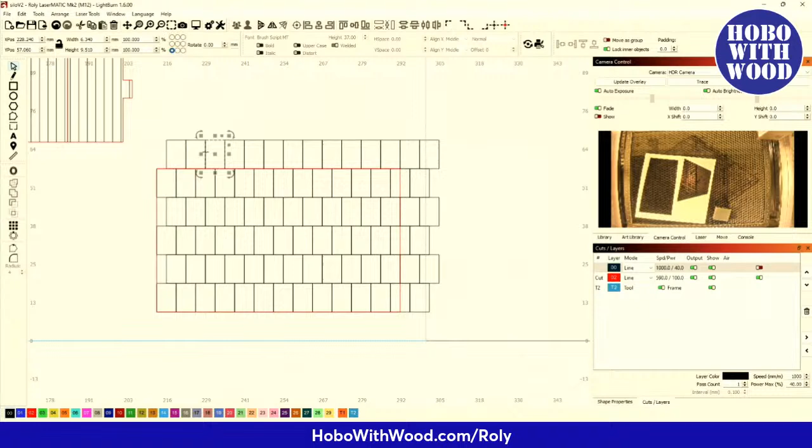I didn't select all of that when I designed it, but now I can select it all, hold control, and right click or left click to deselect, group it all together. Now hold shift and select it again and tell it to center it.

Actually I want it aligned to the bottom. I should have done align vertical center. So we'll undo and tell it to go center.

There we go. Now with that selected, I'll need to duplicate my outer piece because once I cut, it'll go away. So I have to Control D, duplicate it. So there's 2 of those there now.

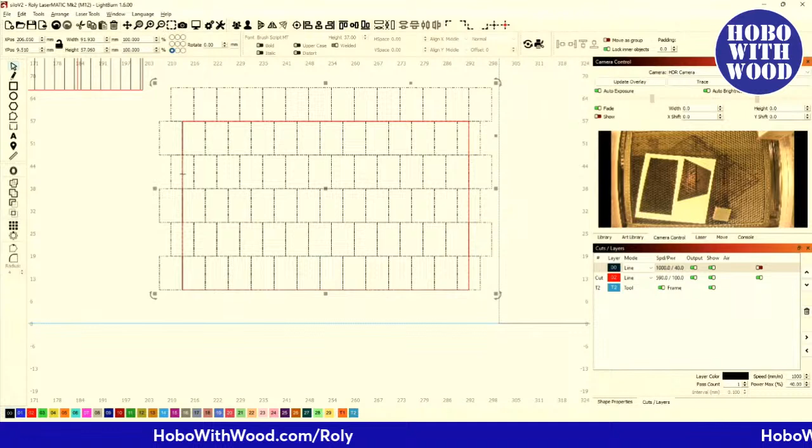Select my array first, then hold shift and select one of those duplicates, and alt shift C for cut. That'll leave the selected perimeter, just hit delete. Now I've got my shingles nice and centered and they look good. Now I can group all of that together.

Actually, I think there's going to be a problem here in a second, but we'll go there. Draw out a perfect circle.

That circle needed to be 295 divided by pi, 3.14. I did not have the aspect ratio locked, so I got 93.949. Didn't have it right again, 93.949. There we go, so there was my circle.

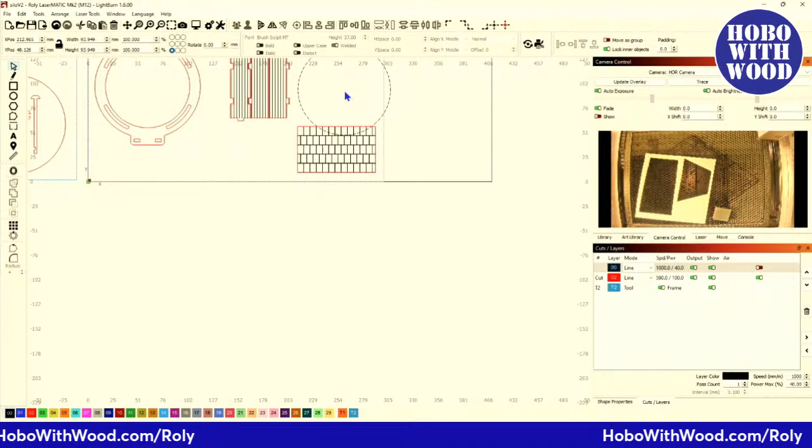That's how I got my roof line. I knew based on the size of the roof, I needed that roof to... there it is, yeah, it came based on the overlap. I had the side wall of the shed about like so, and of course the full length out, so there's a little bit of an overhang on the shed roof.

So the wall, the external wall, would go all the way down like that. Then I just moved that down until I had the right contact, and then I just said okay, A subtract B. And I'm going to get rid of that exterior wall so it's not confusing anybody.

Remember earlier I said you can't, the lines are not shapes, so they act funny. I'm not able to use the Boolean tools because those are lines, not shapes. So if I select that piece and the circle, I can use cut shapes, but I can't use any of my Boolean tools over here.

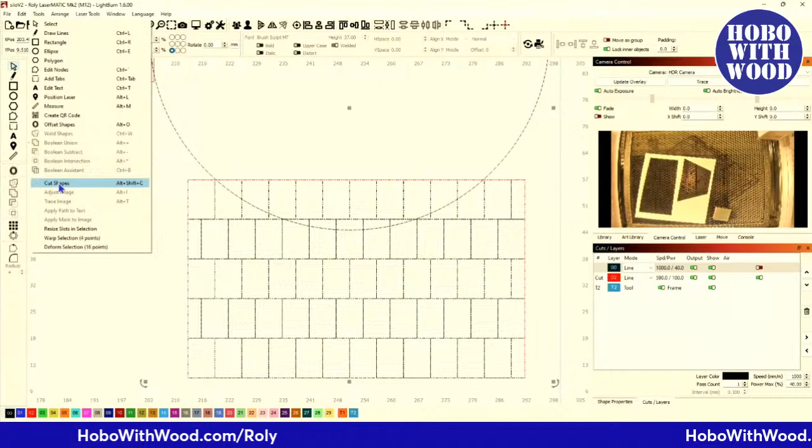So if you select what you want to keep and then hold shift and select the circle, alt shift C is also cut, but you see what's flashing is the answer, the piece you want to keep, because of the order I selected it. If I selected the circle first and then that piece, alt shift C won't do anything. So you have to go back, select the piece you want to keep, select your circle, alt shift C for cut, but don't delete what's flashing. Select the other piece and delete.

And now you've got this open line here, and that's where I said your problem comes in, where you can't have lines and cutting and Booleans. We needed to use Boolean on the outermost perimeter, but you couldn't use a Boolean because of the lines. So when you tried to do cut shapes, you got the shape you wanted, but now you don't have a usable piece. So you have to go back.

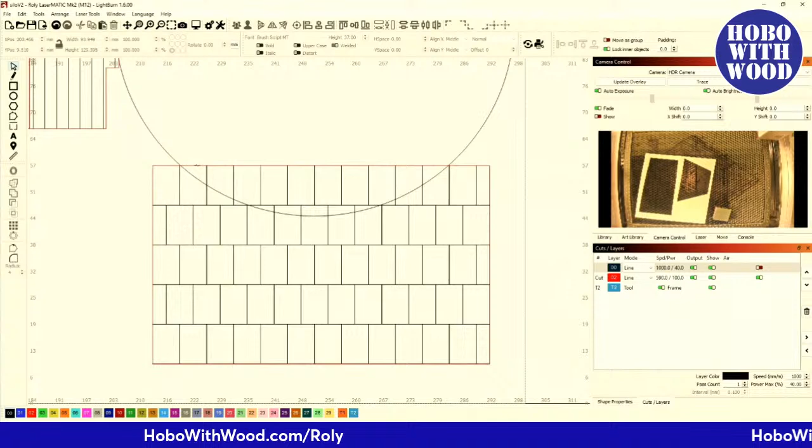And then do a duplication of this circle. We're going to ungroup all of this, and we're going to say, we've got just the perimeter, hold shift and select one of those circles and subtract it. Now when we did that, I'm going to put that back on the cut path and turn off the black path or the black layer. So there, it gave me a closed shape of the perfect piece that I needed.

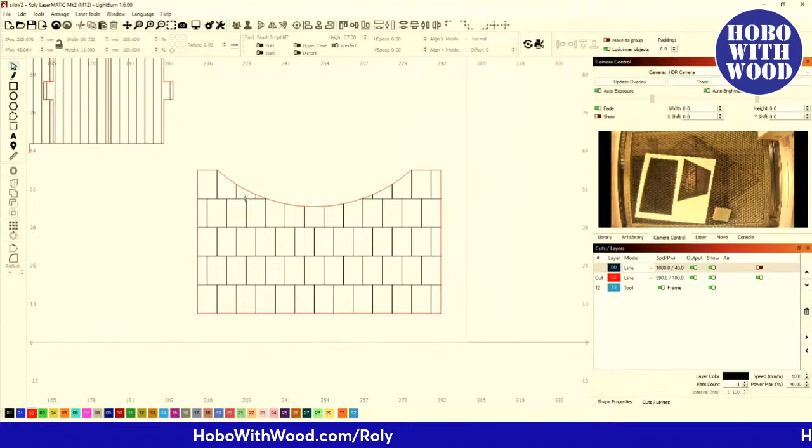Turn that back on, but now my shingles don't match, and that's why I duplicated this. You couldn't use Boolean to get the results you wanted, but now you use that array, select it, and select that circle, and now use alt-shift-C, then select those and delete, and that got rid of them and gives you your final finished piece for your roof.

There's a lot that goes into it, especially when your brain works like mine does: 2 steps forward and 1 step back, 2 steps forward and 1 step back.

People use credit cards all the time. I don't know why you can't use... if you're talking about my website, hobowithwood.com. Hobowithwood.com is my website, and people use their credit cards and PayPal and all that all day long, Mike. So I don't know why you wouldn't be able to use a credit card.

In fact, let me go... now you got me concerned because this is how I make my money, this is how I feed myself. So squirrel, go look and see over here. Auto. So yeah, I've got the option to buy with my Google Pay, PayPal, or Venmo.

And right now we'll just add to cart. View cart. And MasterCard and Visa, if that's what you're talking about.